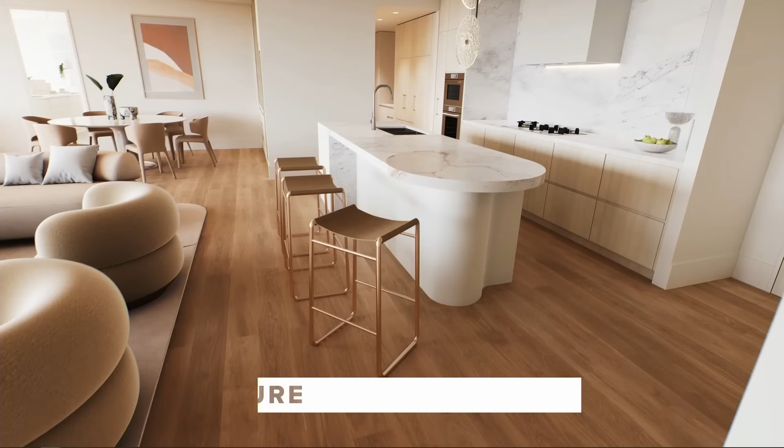So this is just a little sizzle reel. We're an architectural visualization company, so we're doing images, we're doing film, and then in the last 10 years we've been doing a lot of interactive and real time. So we've got virtual production, we've got large-scale digital twin, we've got virtual tour for interiors, we've got experiences, we got products. We get a bit of everything.

But today I mostly want to focus on everything real time.

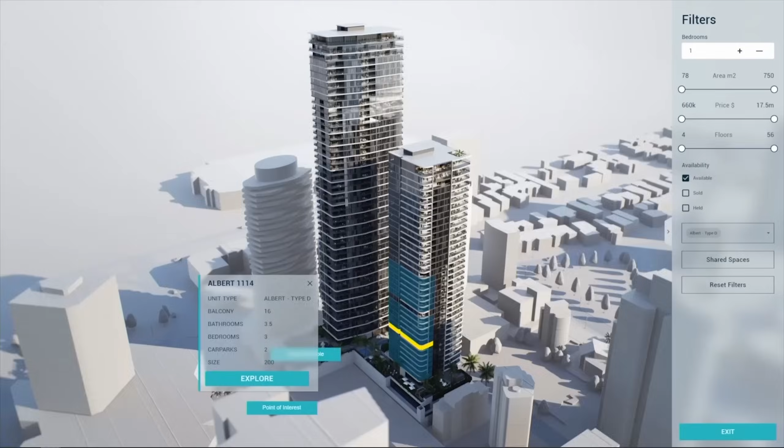In terms of real-time product, we have an interior pipeline, we have an exterior pipeline, we build experiences. These could be VR experiences, or display suite experiences, or product experiences. And then we're also doing virtual production. My talk will be focusing on the exterior stream, because this is my pipeline. It is quite different from the interior stream. The interior at this point is still using baked lighting. Everything that we do with the exterior pipeline is using dynamic lighting and all the latest UE5 technologies.

And the project that I want to be using is Laheq Island. It's a project by Red Sea Global, and it's a residential-led development at the Red Sea. So what is Laheq? It's a 6-kilometer long island, about 400 hectares, designed and conceptualized as a forever garden.

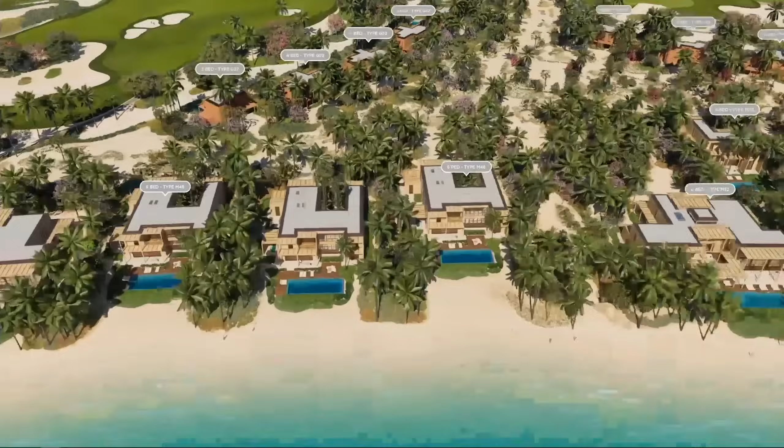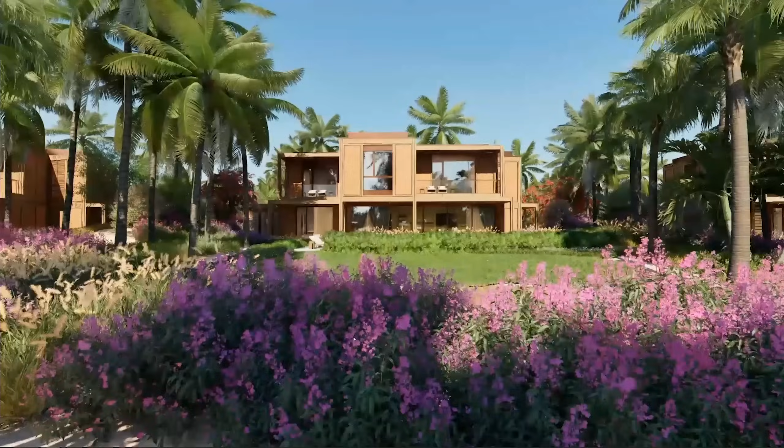So it's going to make it very challenging for us to be able to visualize it correctly, and also to constantly stream in and out all of this geometry. But hopefully, as you can see in the video, we've done a good job of it. There's more than 550 villas, and it all needs to be high quality, highly detailed. There's a crazy 800-meter diameter apartment and hotel complex known as the Ring at the center of it, basically kilometers of unique architecture that we have to integrate within this project.

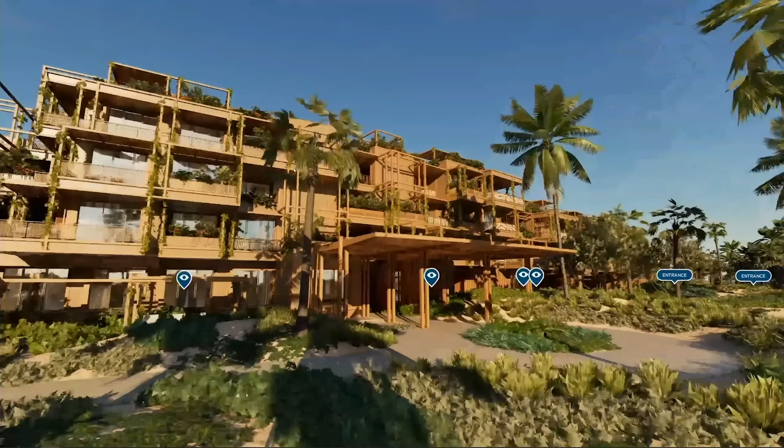There's many amenities. There's an 18-hole golf course, there's bars everywhere, and we have to create everything. We have to be able to see it from a regional view to a district view, to a medium distance view, and all the way down to ground level. Everything needs to look good, and everything needs to load super fast.

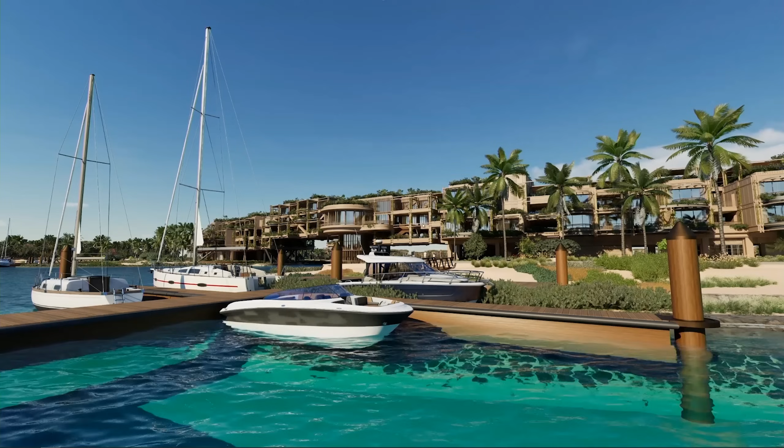Games usually don't need to move around this fast. Usually games can use a loading zone or something like this to achieve this kind of result. So that's been the most challenging and most fun part of this for me, really trying to push the boundary of how much I can actually show at every level without getting too many hitches.

We're really pushing the World Partition system with this project, and it's going to be part of the things I'm going to be talking about.

Our client's goal in this particular case was to create an interactive sales application. It's something that we do at The Boundary. We have a sales app, and most of our Unreal experiences are wrapped within this sales app. It's really our way of deploying our projects to our clients. We're not just shipping a random executable. Everything comes with a launcher, the Boundary launcher, and everything runs through this sales app. The client is not interested in gameplay experiences at this point. They just want a more guided experience. They know their target audience.

They know also that real-time controls and navigations can be a bit confusing. So what you saw before in the video was very guided. It's more like a hierarchical navigation system.

But truthfully, they know that this project will last 2 years, 3 years, 4 years. So the point was to create complete digital assets for them up front so that once this project is done, we can move on to building more outputs out of it - films, television commercials, experiences, and all of this.

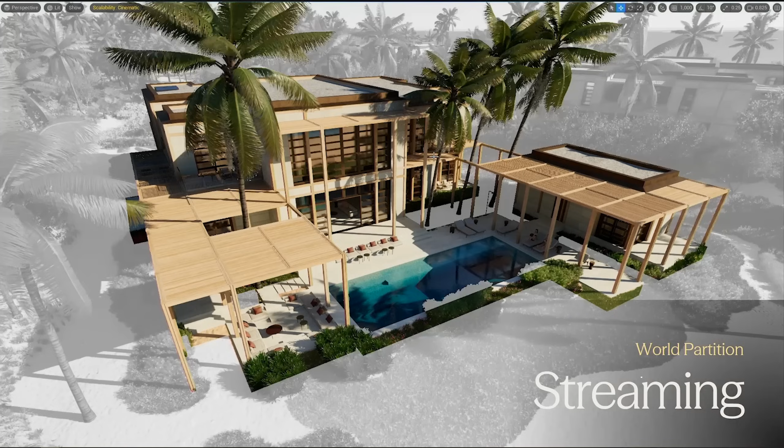This is us preloading everything that's inside the project using a streaming volume. So we've preloaded everything, and what we're doing with the streaming source attached to the player is basically toggling on visibility. This is definitely something we've noticed - World Partition is good, but not good enough for us to load dynamically hundreds of thousands of objects every second. So we kind of have to do a little bit of the work for it and preload everything into memory because we have spare RAM.

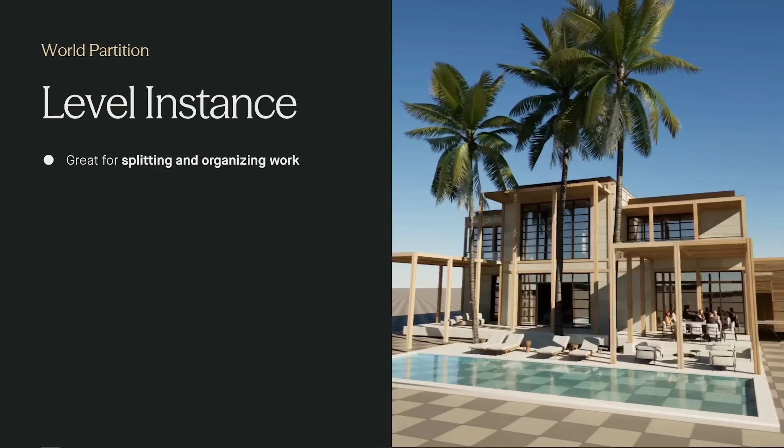And then we purely just need to show this. So finally, at the ground level, you got all our level instances. Level instances are great for splitting and organizing the work. So we've got, say, 40 hero assets, 30 villas, 10 amenities, and all of these need to be worked on by artists - this is just a great way for them to work through it.

So our artists don't work in the main world. They usually work inside the level instance like this - it just makes it a little bit less confusing. When you do this, the issue is that because these are level instances, you cannot have sub-levels. So if you wanted to bring your own light and your own floor and your own pre-made lighting system, what you can do is toggle on 'is main world only' on all the assets that you don't want to go into the World Partition level and want to stay in the persistent level. Most of our level instances are set up like this - they have this space lighting.

We nest level instances together to create districts or regions, and that's just going to enable artists or groups of artists to work on a particular part of the project and just focus on that. They still have the ability to go back to the World Partition level if they wanted to see how everything fits together, but most of the time this is what they'll see - their own assets.

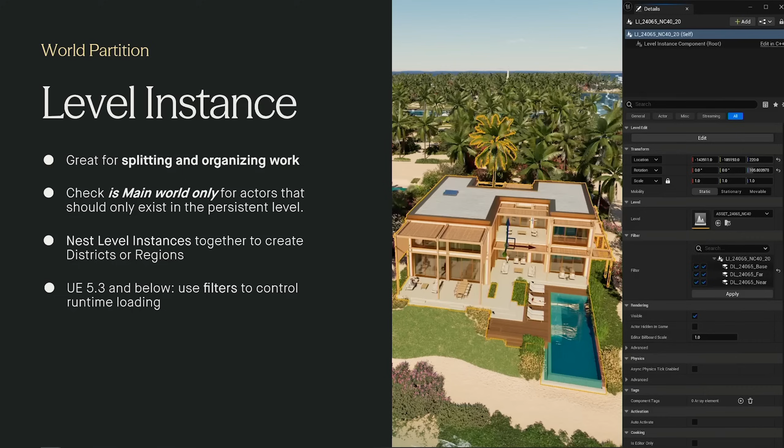It's like anything that's stored within the level instance. So if you have a couch in a level instance and wanted to load it in a near grid, you cannot do this. What you'll have to do is bring everything that's supposed to be in the near grid together, and everything that's supposed to be in the base grid together, and then in the main world give them that runtime tag. It's very tedious. We've been using filtering, or level instance filters, but as soon as we move to 5.4, I think this will be resolved.

Okay, so we use a virtual render pipeline, and you all probably know what it is. We get Nanite, we get virtual shadow maps, we get Lumen, and we get streaming virtual textures.

These are high-end features made for high-end hardware. All these technologies heavily lean into the concept that we're loading exactly the data we need at the given moment, regardless of the size of the overall object they represent. And the thing with the system, in my view, is if you're going to use any part of it, you need to lean into it completely. There's no half and half.

You can definitely just use Lumen, and you can definitely just use Nanite, but there are efficiencies built into all these systems, amazing efficiencies, that I'll be pointing out later. So this is kind of a whole package really. So first, Nanite.

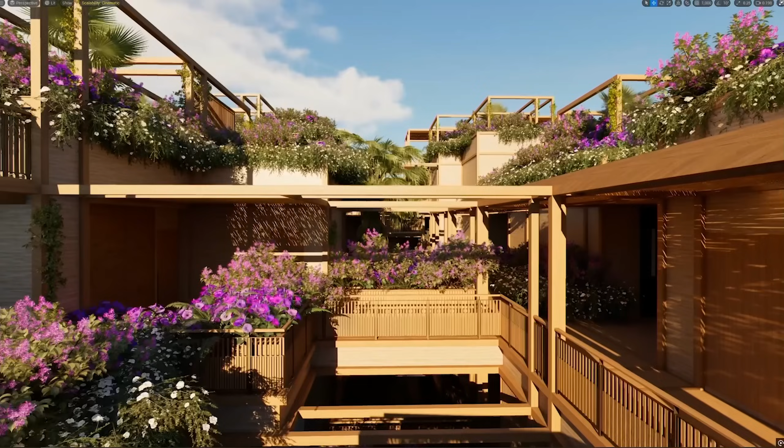Higher triangle and object counts scale incredibly well. We've been abusing it over the last 2 years with giant landscape tiles with tens of millions of polygons. It allows for film quality assets with minimal optimization - still requires optimization, but minimal. And obviously, automatic LODs.

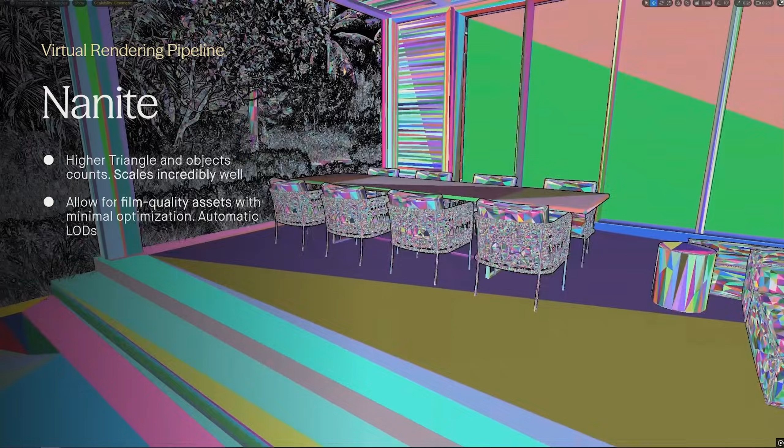You can see we use it across all our projects, everywhere. I hope this view isn't making you dizzy, but we're not forgetting any assets. Nanite gives us massive draw call reduction. I started doing all of this in 4.19, so my way of working was quite different - the things I was worrying about were completely different from what I'm worrying about now. Now I don't have to worry too much about draw calls.

This is amazing. So what we've learned with Nanite is, well, you can't have everything in Nanite because Nanite doesn't support everything. So anything that's translucent, just use opacity mask to replace non-essential translucent material. That's mainly for assets with a lot of different materials - a boat with 20 different materials, you need the boat to be in Nanite, but you'll want the translucent material to not be translucent and instead be an opacity mask.

If you're working with all the elements separated because you work in architecture, that means you can just have your glass and turn Nanite off, I guess. But in the case of assets like that, you're just going to need to use the opacity mask.

Ray tracing, Lumen, collisions, and more only trace against the fallback mesh of Nanite. That creates huge problems a lot of the time. So in this example, you can see that this buffer is telling me my ground is under the planting, but in reality, what ray tracing and Lumen sees is that these plants are under it, and this is why they're black and it's all noisy and messed up.

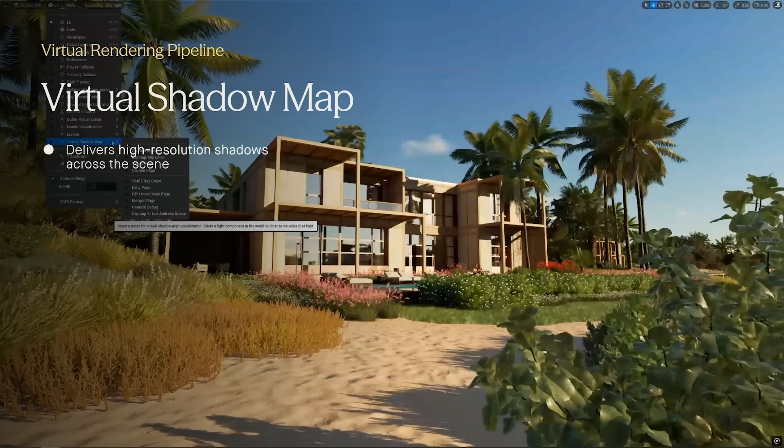The way it works is it caches information into pages, and these pages are conserved between frames. What you saw before was a mix of green and blue pages. Green means it's validated, it's all good. Blue means it's been invalidated, meaning it needs to be recalculated. So the goal really is keeping the shadow cache from invalidating. That's the main priority, to get as much green as possible.

VSM is amazing because it's got huge efficiencies with Nanite. The way Nanite works, by the time VSM traces shadows, Nanite triangles are batched into one big single mesh. So if your mesh is not Nanite and you want to use virtual shadow map, you're going to pay a cost per asset. With Nanite, it's all sort of one giant process.

So with virtual shadow map, you need to aggressively go after invalidated shadows. You're going to need to make a decision on a per asset basis, if this asset should be allowed to invalidate the shadows, meaning should it update the shadows. Say if this asset has WPO on it, and there's wind animation, by default this is going to ask VSM to recalculate all the shadows, so it's going to create a lot of issues like this.

So on a per asset basis, you're really going to need to ask yourself what you need. Do you need moving shadows or do you need performance? I want moving shadows because it looks amazing, and I'm paying the cost for it, but it's okay, I can deal with it. I can gain more performance somewhere else.

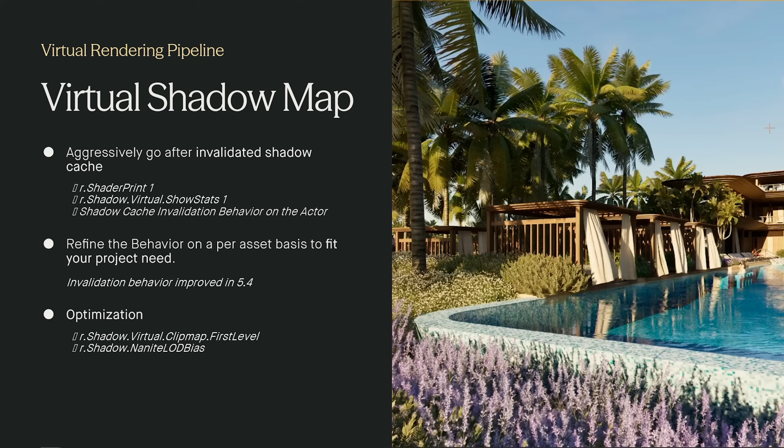Some optimization commands: we got the virtual clip map first level limits, which limits the max texel density of shadows up close. It just makes the shadow a bit less expensive when you're really close to assets. Then we got Nanite LOD bias, which produces shadows from a lower LOD version of the Nanite mesh, instead of calculating the higher density version. Next we got Lumen.

We use hardware ray tracing, not surprising, we're in the architectural industry. We need the best looking GI and the best looking reflection, everything, everywhere. What you're seeing there is the indirect illumination view of the scene.

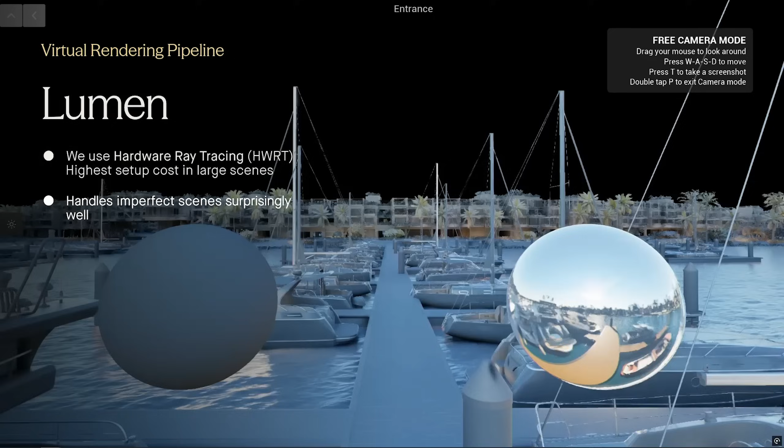Lumen is great, it handles imperfect scenes surprisingly well. This scene cannot be remodeled, like I mentioned before, and yet you can see that we're getting some light leaks, but it's doing the job really. It's providing this amazing GI for a cost, and it's totally worth it.

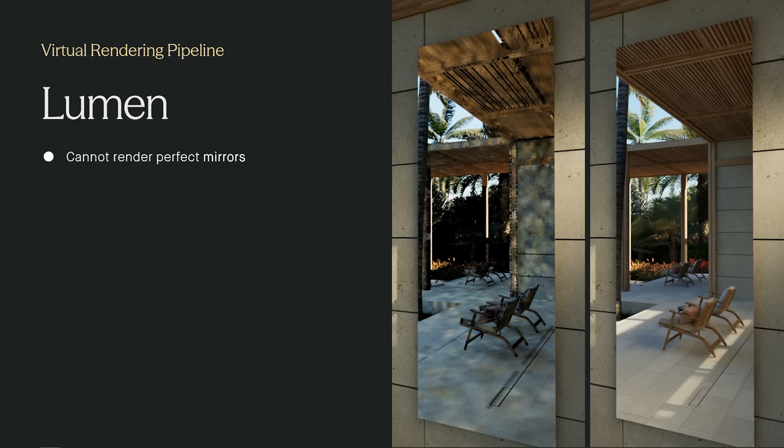So Lumen has a big limitation: it obviously cannot render perfect mirrors. This is a deal breaker for high-end interior architectural visualization, and this is why our interior pipeline has been forced to consider, or stay with, baked lighting. Most of our clients would not be interested at all in what you're seeing on the left there. So until it becomes what's on the right, we're stuck with baked lighting for interiors, which is a shame because it makes it hard to consolidate our pipelines together.

We don't care that much about exteriors because most of the time you don't get to see mirrors like this outside, so I'm perfectly happy with the left view. If the left view appeared dirty to you, it's again because the reflection uses the Lumen scene, and we cannot clean or remodel the model. So this Lumen scene is not the greatest, really.

If you use hardware ray tracing, which we do, you can turn off affect distance field lighting on your actors. If you don't use distance field features anywhere, like in materials or elsewhere, and you use hardware ray tracing, do turn off distance field lighting because it costs a lot to calculate, especially when you have hundreds of thousands or millions of actors constantly streaming in and out. Every actor has to stream its mesh distance field, so we tend to just disable affect distance field lighting for most actors in the scene.

But if you really think you're never going to need this, you can go to the config and set r.DistanceField to 0, and then you don't need it. The reason I don't do this is because I still want the distance field to be built up on the actor, so that if I need to deploy this on lower hardware, or for virtual production or something else, I can just turn on software ray tracing.

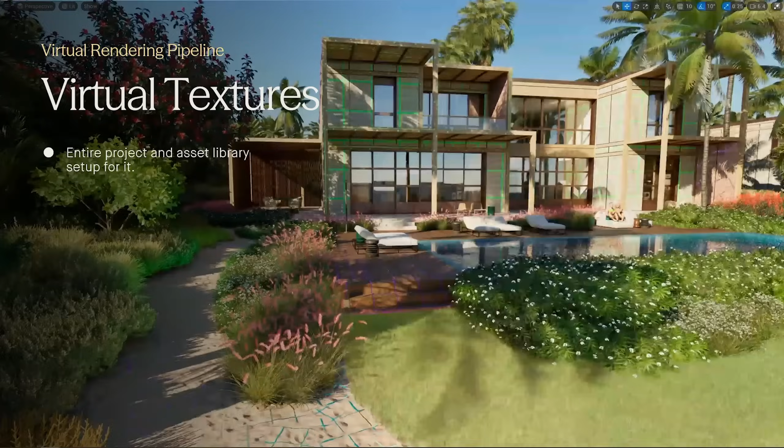Virtual textures: the entire project and asset library is set up for it. We didn't start like this, we sort of went half and half at the beginning, which we kind of regretted since it made our materials really messy. Now I'm totally in love with it, I think it's amazing, and I recommend people who work with projects at this scale to use virtual textures. By virtual texture, I mean streaming virtual texture, not runtime virtual texture, which are different things.

What you can do with it: you can load UDIMs, so you can load hundreds of thousands of pixel textures. A lot of these worlds usually require us to load a large context around them. From it we load aerial renders, we have splat maps, we get some flow maps, and all of this, and we're not really paying that much of a cost for it.

With virtual texture, you should configure the memory pool size per texture format group in the base engine ini. We mostly use DXT1, BC5, DXT5, and BC7, so we decrease the other pools and increase these pools a little bit more.

What this view enables you to see is the residency view. It lets you see how much of your pool you're using at any given time. If the red line reaches the top, it's usually bad news, so you want to try to keep the yellow line low as well.

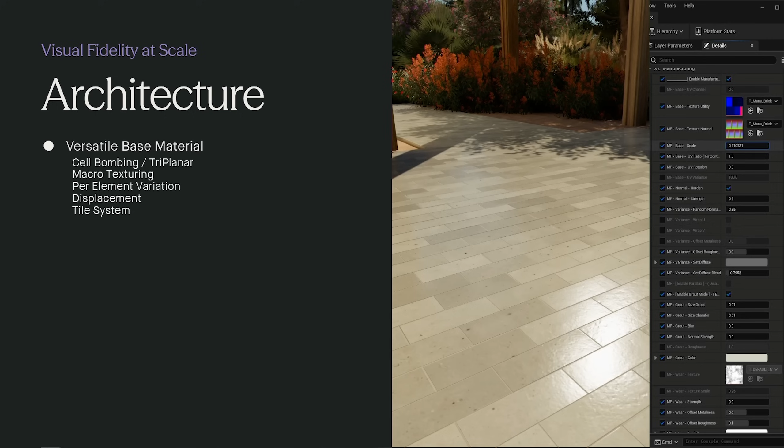Like we built a tile system, as you can see on screen there. So all of this needs to be available for your artists to feel like Unreal is a great software, because if you just give them a PBR material, they're going to be a little bit frustrated.

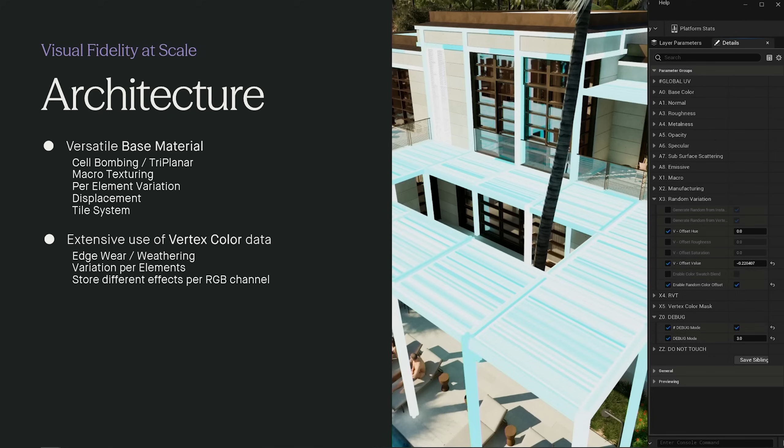We use vertex color data a lot. I just mentioned before, per element variation. Unreal does not know what elements are when you give it a bunch of polygons, I don't think it knows what polygroups are or anything like this. And yet we use this a lot in architecture to identify what is an element versus another, and being able to put hue variation and value variation. So what we do is in our DCC, which is 3ds Max, we just assign a different vertex color per element, and then we use this to do a bunch of stuff to it.

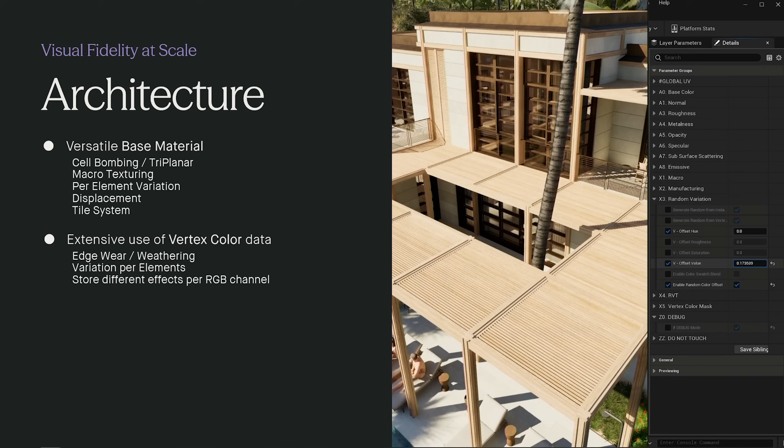But that's not the only thing we do with vertex color. We can do edge wear, we can do weathering. You can also store different effects per RGB channel. So you can have your variation per element in red, and your weathering in green, and I don't know, something in blue. I can only think of two.

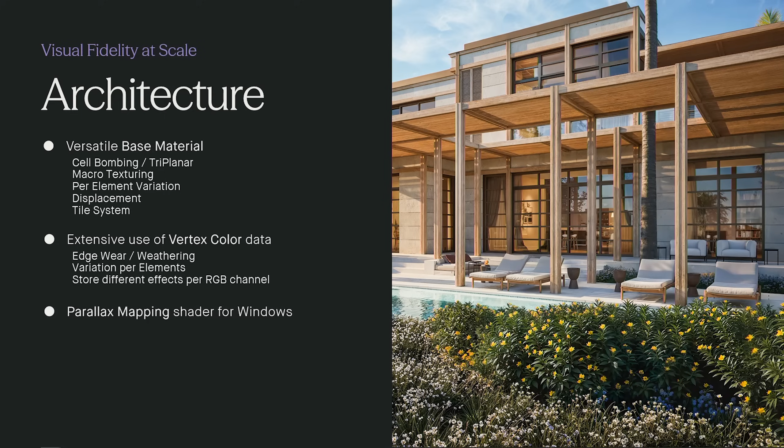If you work with architecture, you're gonna need parallax mapping. I don't know exactly what the right name is for it, everybody calls it differently, but fake interiors, made famous by the Spider-Man game. We don't usually get closer than this, so this is enough for us. If we do end up getting closer, usually we tend to turn it off. But most of the time we're not paying to model the interiors, so that's perfect for us.

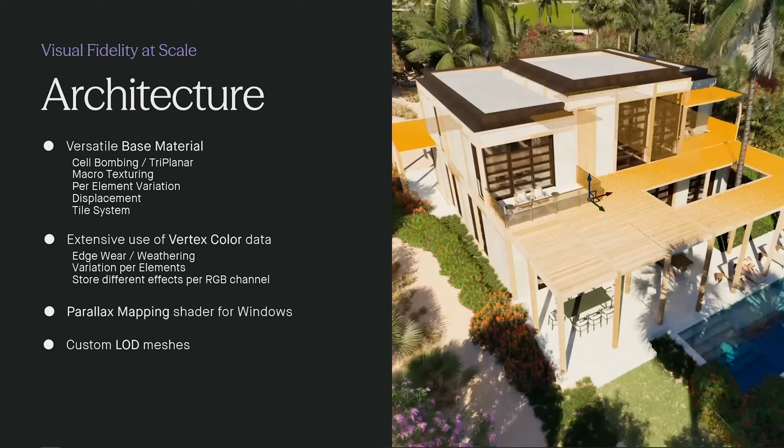So Nanite has some limitations, as you know. It makes its own LOD, you can't really control what it's doing. And with architecture you have a lot of thin geometry, so you end up a lot of the time with aliasing or moire problems. How we solve this is we create custom meshes that we put on top of these objects, and give them, in this case, a dithered material that disappears over distance. So this kind of thin geometry just doesn't appear over a distance because we're hiding it. This is the kind of stuff you'll have to do in Unreal.

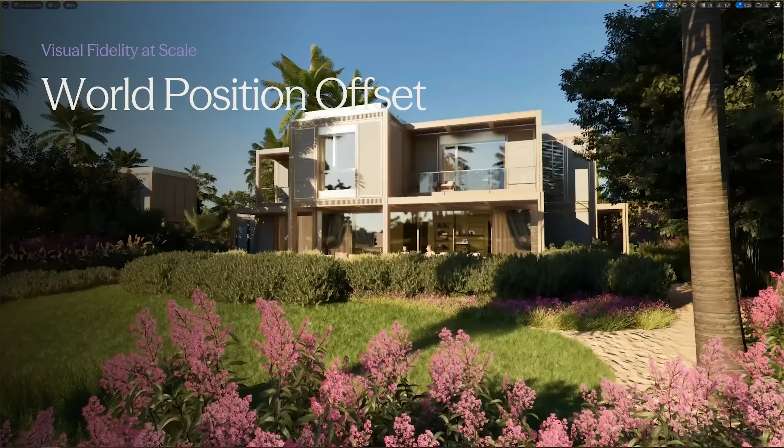Next, world position offset. This is how we add life to our world. We use it for trees, horses, people, dogs, golf, curtains, all this kind of stuff. We're using it for water, doing our displacement on the water, and we're using it on our world as well, to pretend that the Earth has curvature. We're doing all of this with WPO. And because WPO is expensive, you have to be really careful about the distance you attribute to each mesh. In this case, as you can see, we're being pretty aggressive about what we're allowing to be moving, I guess. Ooh, I should have clicked.

Foliage, we call it softscape. Our clients call it softscape.

World Partition struggles most with large numbers of instances. So per cell, or per runtime grid cell, we really have a number we're trying to get to. Ideally it's like 10,000 instances of anything. It doesn't really matter if you're spawning 10,000 cubes or 10,000 trees, though it matters a little. It's just loading 10,000 objects in and out of memory, and it starts clogging up everything. So you really want to stay under this number as much as possible, and you're the one determining what your cell size is.

Nanite struggles most with large numbers of unique static meshes. So if you work in Max with Vray and Corona, you're going to be putting 20 versions of that coconut tree there, and that's not something we can do. Ideally we use one instance of one particular asset, because it's way more efficient to just reuse the same polygons over and over again.

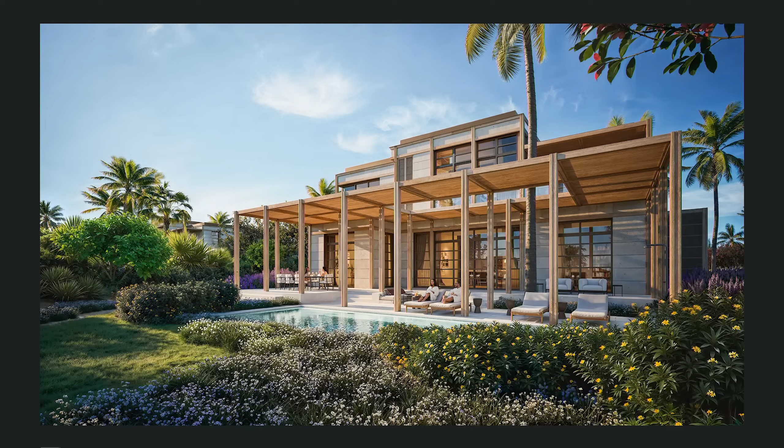So really this is a guide to path tracing, or at least a little introduction, talking to you about the biggest problem we've had with it over the last 2 years and the recent solve we found, and how to build a world that is ready to toggle on this path tracing switch and have it look amazing.

So the consideration: we want to be able to create incredible looking content with minimal rework or model changes when we do path tracing renders. We're going to need to avoid the features that are incompatible with Path Tracer.

As much as I would want Nanite tessellation everywhere, and I'm very sad that I can't use it, I cannot have all my materials using Nanite tessellation as the base, because if I turn on path tracing it looks completely different. So it's kind of the sacrifice we're making there, and there are other features like this. Until Nanite tessellation is compatible with it - maybe it already is in 5.6, tell me after - until then, we just can't use it.

This is a no-no: every image will need relighting. We don't intend to preserve lighting when we change format. All of the outputs I've mentioned before will require relighting. This is hopefully a given for anybody.

Challenges: Path Tracer in 5.3 is still experimental. It's kind of a minefield. The challenge we have is we're working with a live project. This project has a long lifespan, as any large project will. This is going to be iterated on. Clients will change the design again and again and again over the next 2, 3, 4 years.

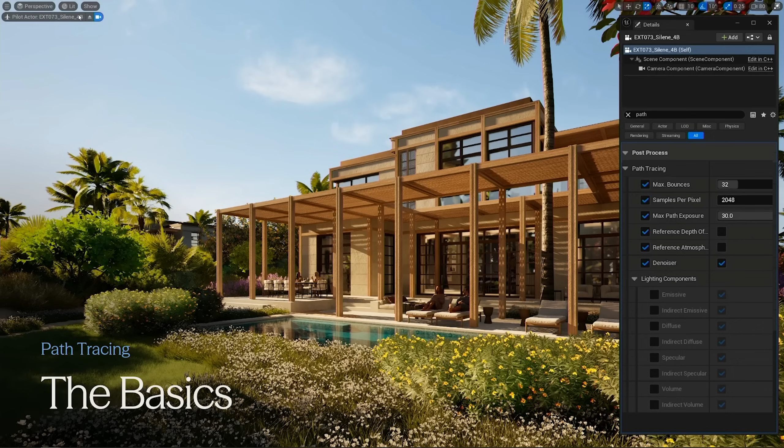So basics, I hope I don't need to teach you this, but you've got a level, turn on path tracing, boom, it looks good. Not exactly, actually. You need to change the Nanite ray tracing mode, because by default ray tracing does not see the full quality mesh from Nanite. Then after this, you're going to need to use your camera, ideally.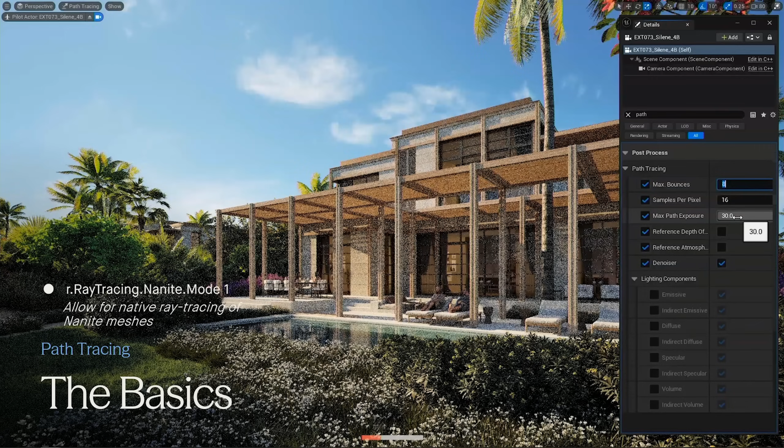I prefer this to the post-process, to just tweak some settings. The settings are really easy to understand. You get samples per pixel, which defines how long it's going to be accumulated for. You get max bounces - we do a lot of exterior renders, so we don't need that many bounces. Max path exposure, usually something you want to set a few ticks above your exposure. You can check what your exposure is using the HDR eye adaptation mode. In our case, we're at about 0 or 1. We don't use physical values.

So that means you need to set your max path exposure just above this, and this is going to stop the accumulation. A few exposure ticks above your current exposure, if I understand correctly, is going to stop fireflies and things like this.

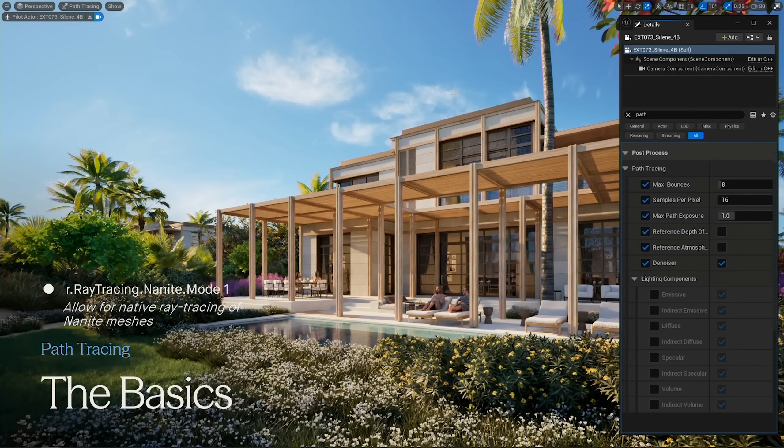But that's effectively it. Then you need to consider if you want to calculate the depth of field, if you want to use the atmosphere or the skylight for your GI. And then you need to do a little bit of post-production, and then it looks good. So there's a bit of setup that we need to do before that.

You need dedicated path tracer settings in most of your master materials, and you're going to need to use the path tracing quality switch node. In translucent material, as you can see, I've got a path tracing section and a Lumen section, and all those settings are quite different. That's just what it is, really. The biggest one is probably index of refraction—it's accurate for path tracing, and for Lumen it's whatever makes it look good, I guess.

Same goes for, well, it's not translucent—for two-sided foliage, the subsurface value. You're going to need to pump that up quite a lot in path tracing, so we have a booster just for that feature.

You're going to need to be careful when you build your world if you want to do path tracing stuff. Nanite dynamically instances actors, it's amazing, but when you turn on the path tracer, you end up back in the old ways of working, I guess. So if you haven't structured your world with instanced static mesh components, you're going to crash. You need to instance things the old way with path tracer. So even though Nanite is amazing and automatically instances everything, we're still using ISM throughout the project.

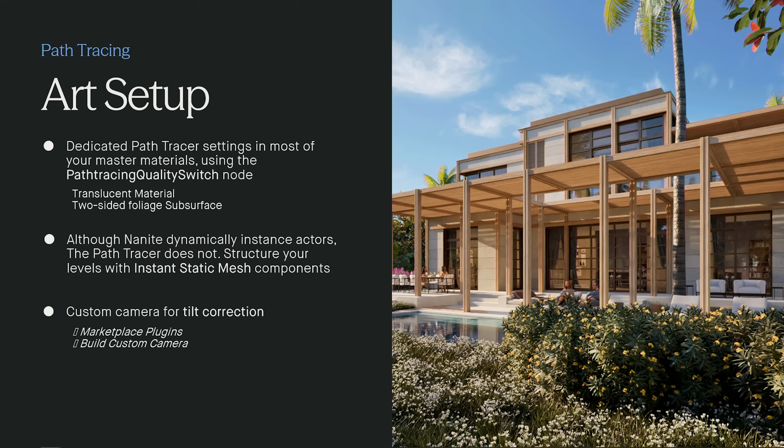You need to build yourself a custom camera with tilt correction. This is just a requirement for the ArchViz industry, really—either using a plugin from the marketplace or building your own.

Okay, so now we've got 100 shots to do. Something I haven't shown in this slide, but one thing I tend to recommend is to make a duplicate of the World Partition level and basically make a marketing version out of it. And if everything inside your World Partition level is a level instance, then you can reuse these same level instances. But then the world itself is just a different one than the runtime one you're using to package.

It's definitely a good thing to do, because artists would screw up your setup, I guess, since they have to work fast. So first you make a duplicate of that World Partition, keep all the assets inside the same, and then you're going to need to create one shot, one sequence, and everything is allowed within the confines of the shot. You can replace the lighting, replace the post-process, hide actors, add actors, replace foliage with Alembic for animation, for example. Why not?

In 5.3, there's this big limitation—you cannot access the actors within the level instance. So if you're trying to hide the parallax mapping, for example, because you want to see the interior, unfortunately you're going to have to break that level instance. And usually what we tend to do is make a duplicate of it, hide the original one, break the new one, and add everything into the sequence. It's crazy, I don't like that.

Rendering. So how do we consistently generate clean and sharp high-resolution renders without crashing? With less crashing—it's going to happen. You can either use the high-res screenshot within the editor for still imagery, or you can use the movie render queue for animation, or if you want to batch process a lot of stills, I guess. I'm mostly going to focus on the high-res screenshot because the movie render queue is quite a long topic.